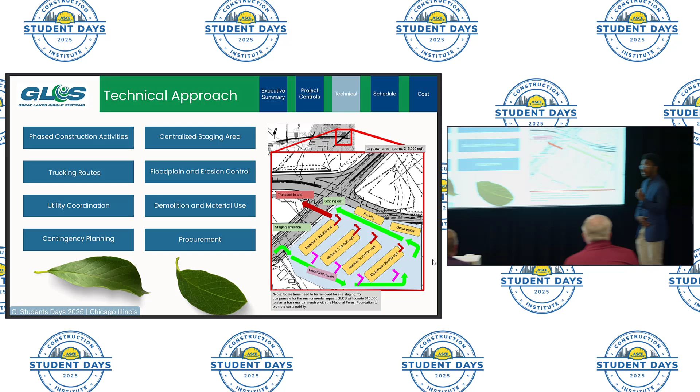Now, this is the real meat and potatoes of the thing, and this is obviously my favorite part, the technical approach. Now, firstly, we have our phased construction activities.

Those will include our construction phase in terms of our culvert design, our excavation, roadway pavement, all the good stuff. On top of that, we have our centralized staging area.

A big shout out to my colleague for creating this amazing demonstration of what it's supposed to look like. In terms of trucking routes, trucks will go northbound on Illinois Route 126, turn in, thanks to our brilliant traffic control management firm, and drop off all their materials in the 20,000 square foot stockpiling bed, continuing to do that, making sure it's efficient and stays on time, because that's something we pride ourselves on.

On top of that, for floodplain erosion control, we wanted to keep this site away from I-55 because it's in the area of the DuPage River, which sees varying water levels, in order to minimize erosion and contamination, because that's the last thing we want to happen at this firm.

On top of that, we also did utility coordination, having weekly meetings with IDOT and the local providers to make sure we stay on top of things and don't run into any power lines or gas lines that could halt production for months on end.

On top of that, we have our demolition and material use. We pride ourselves on green reuse, so if we find any materials that our lab can designate as green use and overall helpful for the area, we will do that, but if not, it will be properly disposed of at the correct area.

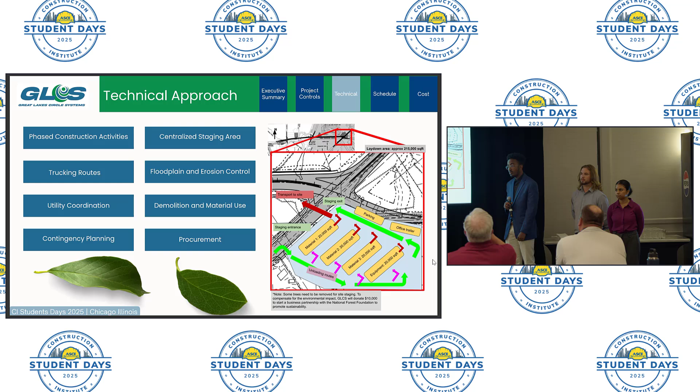I noticed that you put your stockpile plan at the southeast corner, the intersection of 143rd and IL-126. Is that correct? Yes, I believe so. Right, so two questions related to that. I'll ask them separately. First off, do you feel that double handling all of the material is worth the added cost in how it allows you to construct your project in a more certain manner?

So when we were thinking about this, we were looking at the general area. The whole point of this project is we don't like having heavy trucking in this area. So the idea is rather than having to shut down that road during potentially busy times, even at the site visit the contractor took in the past few days, just pulling into the driveway backed up cars almost 10 in each direction. The idea is we can look at the traffic plans and our coordination with local law enforcement and figure out the best time to have the trucks come in.

It also allows that if we have a stockpile going, if for some reason a delivery gets delayed, we have stockpile ready to go. It also means we don't necessarily have to worry about potential issues with the trucks, or about going through and counting quantities. If a QA/QC issue occurs and we need to stop work for a little bit, we're also able to keep things being delivered without having trucks parked on the side of the road. It also allows us to set up multiple staging and phasing, as the schedule talked about, as we go through and start excavating.

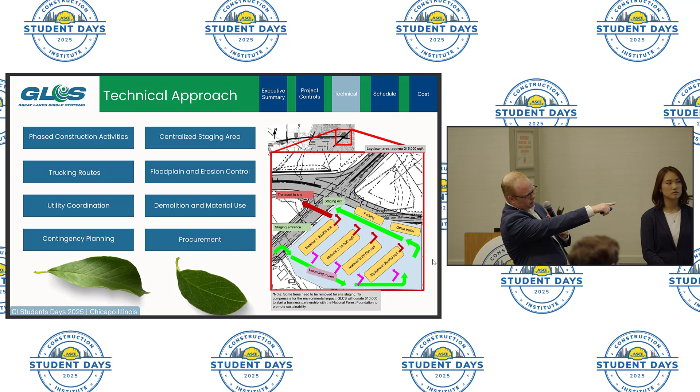We're going to ship that off immediately. But when we start putting down common fill and rock fill in the MSE walls, we don't want multiple different material type trucks coming on site, since we're building a road, not an entire highway. So we'll have a place for them all to line up. As you can see, the purple arrows show multiple places where trucks can load and unload, allowing us to handle multiple material quantities being delivered at once for the different phasing in the project.

Thank you. And I guess that ties into this, but what planning have you done to account for worker safety and public safety for your equipment that's going to be crossing IL-126 in order to get material from your stockpiles to the actual work? Yeah, of course.

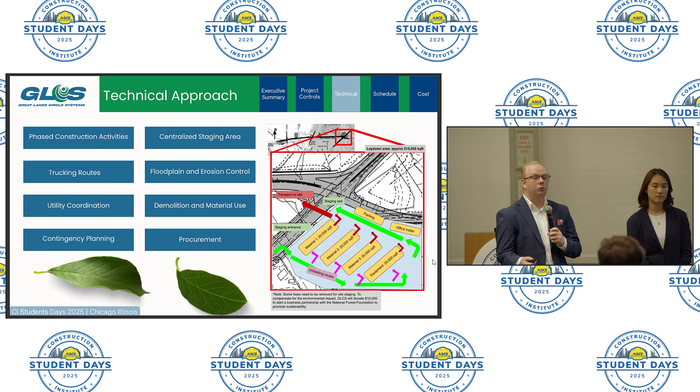So again, working with the Plainfield Police Department, and if we're going to be on state roads, the Illinois State Police Department, to see if we need permits for temporary crossing. Also for safety, if we're going to have any crossing, we'll cover it in the toolbox talk and site safety orientation. We're looking at not a huge machine going across, so it won't be any more than a simple crossroads crossing. We expect limited impact to the local community.

In terms of safety, we'll make sure everyone has the proper PPE on, and that we give well notice to the local community through a website, emails, and signage. We're also going to have an MOT/MPT plan released. We'll make sure we have signage a decent amount out so vehicles know work might be up ahead, and we'll have slow and stop waivers and flaggers to make sure we're prepared for any crossings.

Additionally, being so close to the hospitals and having that contingency plan in place, if God forbid something were to happen, we are prepared to offer medical attention at a moment's notice.

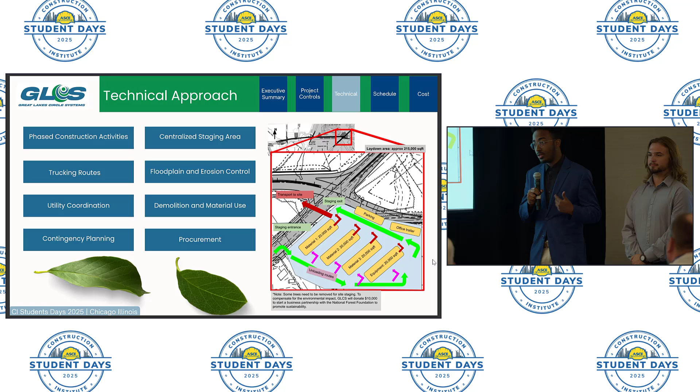And to further add to that, in terms of public safety, we especially pride ourselves on that. We've collaborated many times with local HOAs and local clubs to get the word out and make sure nobody in the area is uninformed, because the last thing you want is people who are confused ending up running into traffic. A lot of times worker safety is determined by how local citizens are driving.

And the last thing we definitely don't want to happen, and I've never had happen at this company, is any worker injuries.

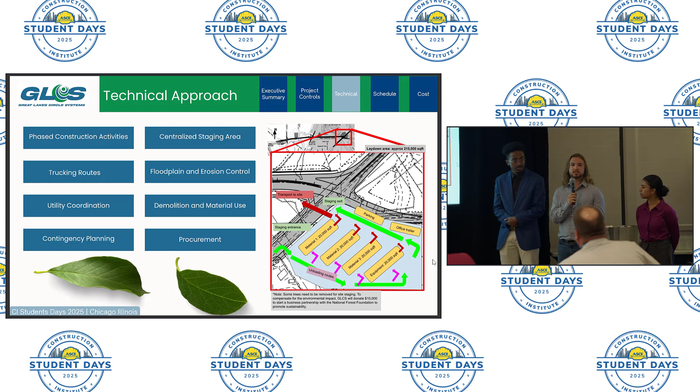As far as a schedule issue, if a subcontractor approached us, for example for the sewer systems, and said they're behind schedule - he'll talk about quality control, I'll talk about schedule - one thing we'd do is request permitting from the city to see if overtime is possible. We understand the hours of this site are 7 a.m. to 3 p.m. An easy solution is asking if we can extend that to 5 p.m., to the end of the workday.

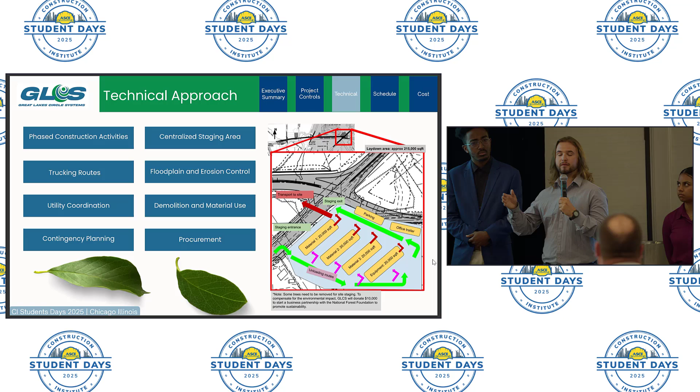If they say no, which is totally within their rights, we would ask that they bring in another crew from the subcontractor, and that they provide reasoning as to why they are not meeting the original production rates. Then we would go from there to see if a second crew is available, and have them start on a different section - for example with the sewer, a section farther forward, putting in more manhole covers, manholes, or piping. Does that answer your question?

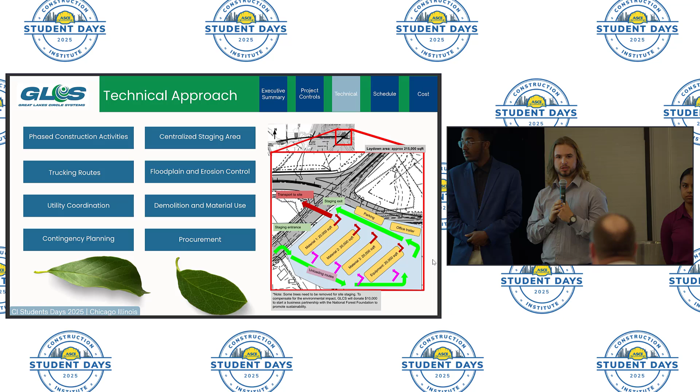And also, as we mentioned, before we start construction we're going to be meeting with all our subcontractors. We got the quotes, we made our selections, and we'll reach out if awarded the bid. We'll go through and make a contract with provisions in there for if noncompliance happens.

For example, we were recently doing a noise wall project, and the contractor said, 'oh, the noise wall panels will get in, trust us.' We said, okay, but you have a contract, you know what happens - if it's a time delay, it's a cost delay for you.

As mentioned, we have scheduling provisions for that, and the selection of being able to stockpile materials means we can do a different phase. Overall, the coordination meetings should allow us to notice any potential issues far enough in advance. If we're noticing that common fill is going to be late, we'll work ahead of schedule to try and prevent that, and since we work in the region, see if we know any other potential suppliers we can work with to mitigate that risk. We also have that in our risk register for more details if you'd like to look. But the idea is just having open communication. If we see anything up, or if the owner sees anything up, we want to address it as soon as possible so we have time to prepare and mitigate any risk it may have.

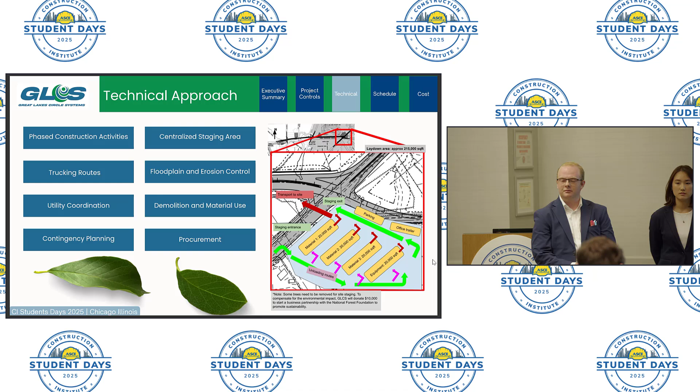I have a question. You talked about some risks that might occur on the project. What do you guys think your biggest challenge would be on this project?

The biggest challenge we noticed going through our risk register was a risk factor around flooding and potential loss of material and time. Looking at the NOAA data, it's highly possible we get heavy rain that will flood a majority of the site. We already have those 7 days built in, but we want to make sure we have preparations. So if we see a major storm coming, we may look to purchase pumps that we can put in the excavated area to try and mitigate standing water.

We're going to work with the local community and ask if there are going to be any flooded roads that would stop deliveries. That's why we have meetings with them, so if there are, we can figure out another route to go. That's probably our biggest challenge, but again, we saw that in our risk register, and we're going to work the best we can to mitigate any challenges from that. As Greg said, we have those days built in for excavation, since that's going to be the biggest risk for flooding, as we're building a giant hole in the ground with no sewers in yet. So we're trying to prepare for that early.

To further add on the weather, we understand it's not only rain concerns but also general wintertime concerns. We know how Illinois weather can be. We've seen the amount of ice pile up on the Chicago waterfront, and the rest of Illinois is not exempt from that. We have multiple regional offices in the Chicagoland area, so if our workers can't go on site, because we prioritize worker safety first, we mainly have them building things that can be constructed inside. They can work on the epoxy or some of the concrete that can be easily delivered through truck beds, anything that can mitigate general delays from rain, flooding, or snow, which is definitely the number one concern in this area since it's right next to the DuPage River. That's something, along with lake effect snow from Lake Michigan, that we've always highly taken into consideration and really done our research to mitigate any potential delays.